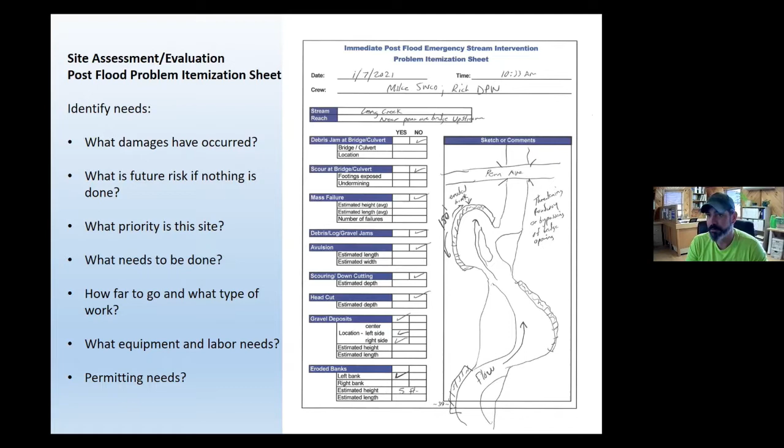What needs to be done? How far do we go? What type of work? What is the labor and equipment needs? This sheet kind of gets you started, and later you can use it as you're planning, to help with the permit process, and in the long run for recording how much work was done and the labor force.

Now we're getting into our walkthrough of the site. We've got a bunch of aerial drone footage that gives us a really good overview. You could see this from driving by on Penn Ave, that there was severe erosion that was a risk to the road.

Although it's not directly at the road, both myself and the DPW person in charge recognized the need to get on this right away, because without any intervention, this would continue to erode towards the road and essentially bypass the bridge. That was the initial assessment, driving by and seeing there's a problem there.

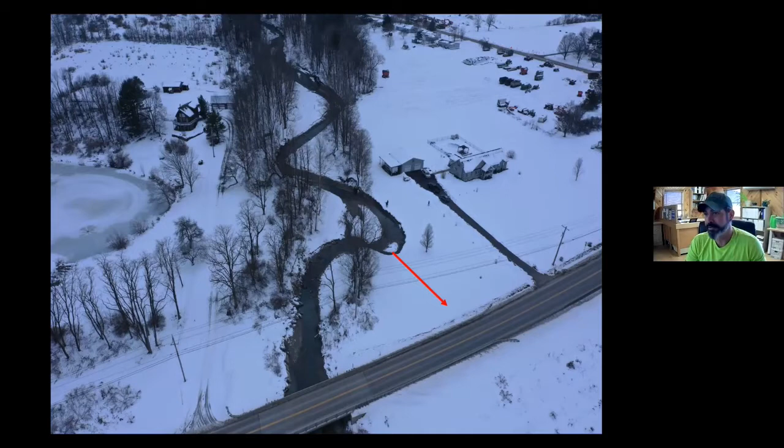Here's a photo of us actually walking out and taking a look at the site. You can see what a large washout has occurred, and the stream is essentially trying to recreate its dimensions, and it's not aligned with the bridge whatsoever.

So we're here talking about what do we do here. Well, let's get some of that gravel from the other side and fill this hole up. It doesn't really look like there's enough there to get it back up to grade and to realign the stream properly.

So we've got to take a look upstream. This is a photo from in-stream looking upstream. You can see the flow coming from upstream is directing the water right into that washout, hence part of the reason it occurred to begin with.

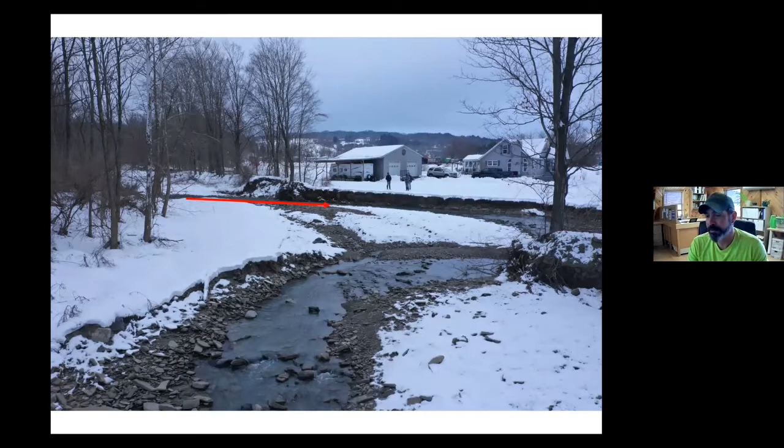If we don't address that, we can refill this entire embankment here, which was the original stream bank. But if we don't address what's occurring just upstream of it, we run the risk of all that work just immediately washing out again in another storm event.

This is just the aerial view with the arrow showing what that last slide was showing, that the flow is directed because of the excessive tortuous meanders occurring here. It's just going to want to wash out whatever we put right in there. Even if we had the resources and time to fill that in and put riprap, our riprap is at risk of failing as well because of that direct force going straight into it.

So we want to start looking upstream a little bit, and also where are we going to source some more material to fill that hole with? Because if we don't fill that hole properly, then we run the risk of it just eroding around and over top as well.

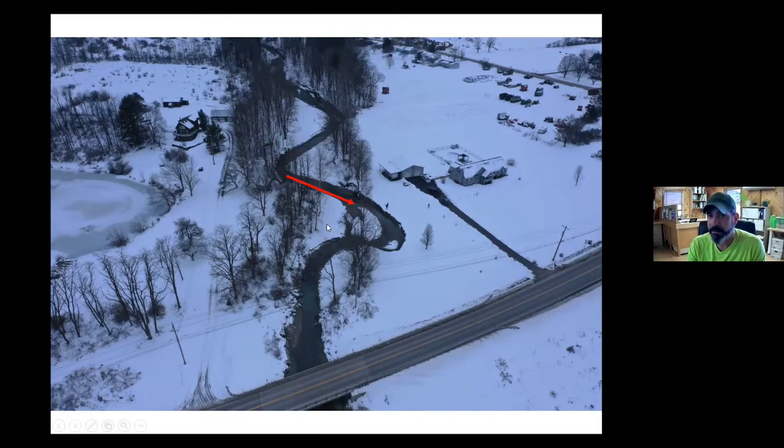This is the gravel bar just upstream. We wouldn't necessarily be concerned with this in and of itself, but because it's causing the stream to flow so tortuously and bring this flow directly into the lower bank, two things here: there's opportunity to steal some of that material to fill the hole down below, and we need to look at the alignment of the stream.

Throughout the training, we've talked about streams need to meander. That's one of the ways that streams balance their energies. So we want the stream to have these meanders, remembering that meandering is a way for the stream to lessen its slope so it can reduce some of that powerful velocity and energy.

We want to see that, but in this case, because there's been such a shakeup with the amount of sediment and meandering, it's causing problems for us because of our alignment with the bridge. So we want to think about that as we're walking upstream.

We don't want to just doze a straight path and berm it up on both sides to make it align with the bridge, because that has a host of other problems that could occur. So we want to try to balance what the stream wants to do with what we need it to do, which is realign back with the bridge and be able to carry that sediment and water flow through without causing excessive damages.

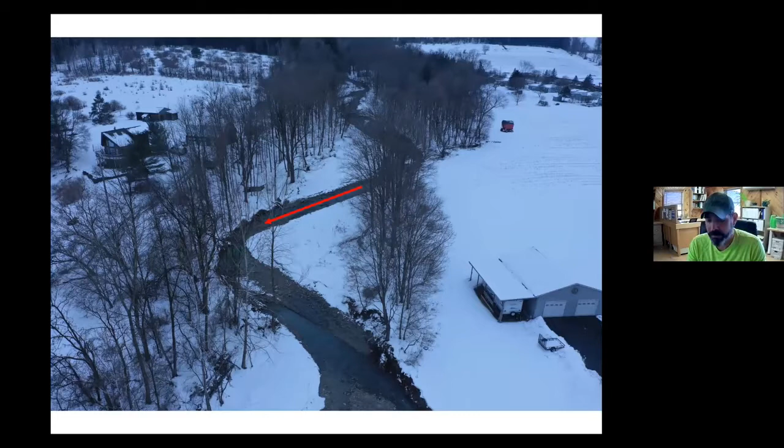Maybe we don't do anything on this bank, maybe we do, but we have to understand what's really happening. As we head upstream, there's the next gravel bar. Again, all of this is natural - point bars forming, the channel having some potentially raw banks on the outside of the bends. None of this is totally abnormal, but because of the huge amount of sediment in this stream from recent flooding events, it's causing some extra problems. You can see on the right bank here that there was a buffer of mature trees that are now gone, and it's beginning to erode into this cornfield. So we want to really take a look at that.

Here you can see there are some of those trees jammed up against the bank, and no vegetation on top of the bank right into that cornfield. So that's potentially likely to continue to erode into the cornfield and become more severe. Those trees have the potential to become mobile in another flood event and get down to the bridge.

In addition, when you look to the left of this photo, you can see how high that gravel bar is. Essentially, that gravel bar has deposited so high that it's technically cut the stream off from its own floodplain. So now all the water is forced to stay in that channel, which gives it a lot more energy for more lateral migration or potential down cutting or head cutting. There's a whole number of things that could be occurring here, and we want to keep our eye on all that sort of stuff.

Another point I want to make about this slide is that these trees here in the bank - we can use these if we're going to do work. We can use these for root balls and for some additional stability in any new bank construction that we do.

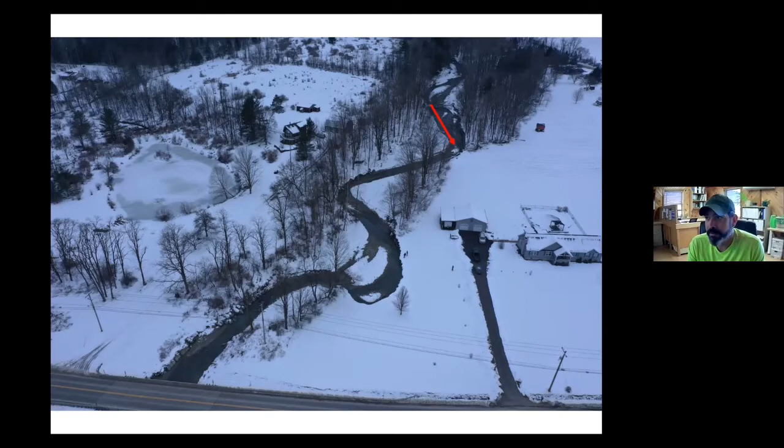And we're looking at, like, where do we stop? How far do we even keep walking at this point, right? And so we got up to the top of that point bar and we see this.

We're like, okay, typical response of a lot of dozer operators would be, well, we got to doze this whole stream. We have to do all of this. We have to keep going. And what we looked at here was like, well, if we even are going to work this far, this is where we're stopping, because now we're far enough away from the infrastructure.

There's no fields or open houses. The corridor is there, even though it's completely plugged with sediment. I don't think we need to go any further because we're past the impact of what we're addressing, which is the alignment with the bridge.

And so we looked at this tree and we said, well, maybe we should get rid of that tree and we could dig it out and use it down below. And then we said, well, we don't need to go up there, so maybe we'll just cut that off.

The roots are still, half of the roots are attached in that bank, even though the tree is down. So they're holding it together a little bit. And so we said, okay, how likely is that tree to come loose and get to the bridge? It's far enough away. If we have time, we'll address it in one way or another, but we'll come back to that. But definitely that's our stopping point.

And so, because you have to stop somewhere. You don't need to, and you shouldn't doze the whole channel. There's obviously an issue with sediment here, and it's pretty plugged up, but there is plenty of capacity within that corridor that you see up above.

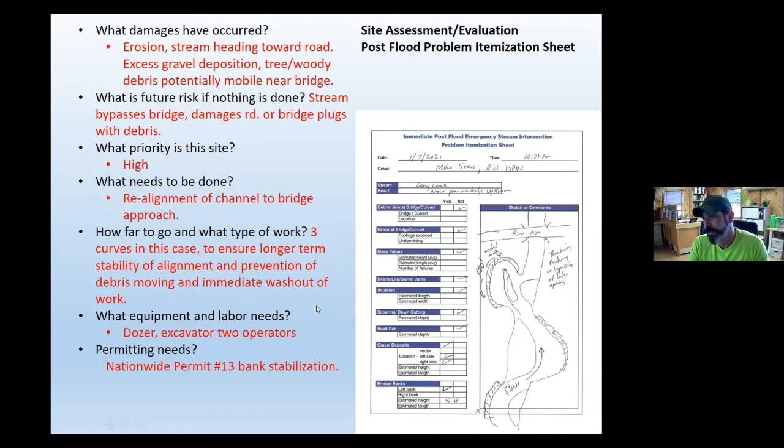So what do we need? A dozer, an excavator, permitting, covered under the nationwide permit number 13. So now we can fill out a little bit more of that information that we're looking for.

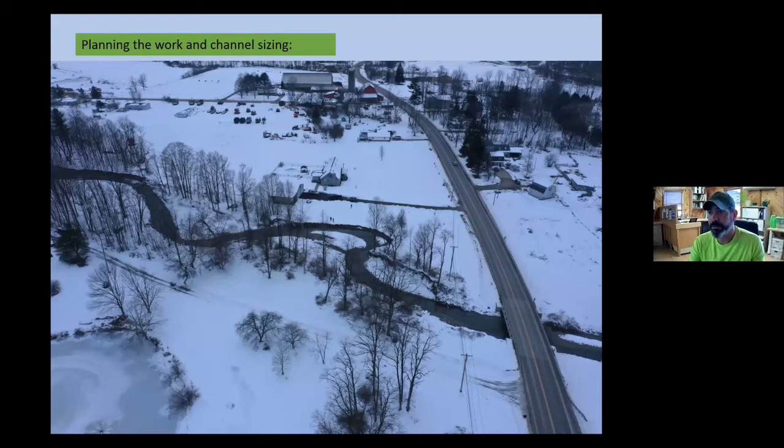Now, getting into the specifics of planning the work and channel sizing, what are some of the questions we want to ask, that we want to be concerned with? What did it look like before? Do we know what it looked like before? What should it look like? How far do we go?

We kind of talked a little bit about those. We're going quite a ways here, but we have determined that we really need to for a number of different reasons. How deep or wide is it? We'll get into that in the next couple of slides with our channel sizing.

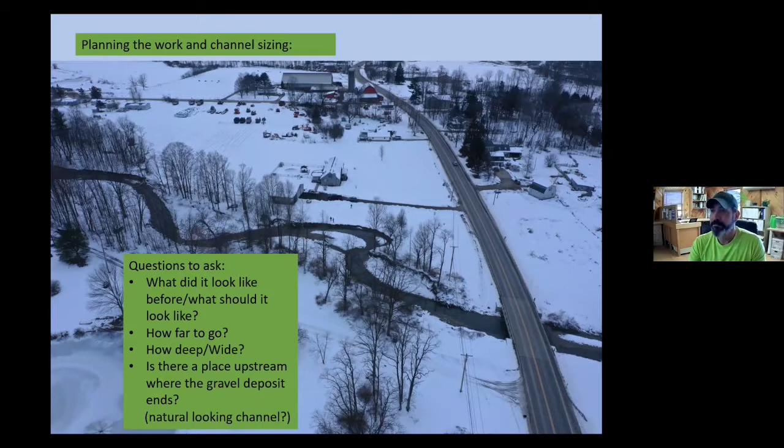Is there a place upstream where the gravel deposit or the issues end? In this case, upstream it's still completely choked and plugged with gravel, but there aren't impacts to the infrastructure, and it's far enough away that we're not going to go any further. We're not going to wholesale doze the stream channel because we don't have time or money to do that, and it's not really going to be a benefit for the amount of work we need to do. Things to be cautious of, things we want to look for.

What are those bank full channel dimensions? Ideally, we find an undisturbed section that we can measure how wide the stream should be. In this case, we kind of didn't have that, but we got some measurements anyway.

If we're removing material, the minimum necessary, we want to watch out for sharp angles and corners. Like in this case, we've got that tortuous meander. That's obviously the water having a hard time because it's wanting to realign itself to a different alignment. Where do we stop?

And the oversight is one very important thing. There's really excellent machine operators that do really good work, are very intelligent people, but sometimes you get behind that dozer and you just go and go and go. So that's where you have to have the oversight. Someone may not have ill intentions, or they think they're doing the right thing, and they just want to keep going and going. So having someone there on site during the work to tell them when to stop sometimes is important as well.

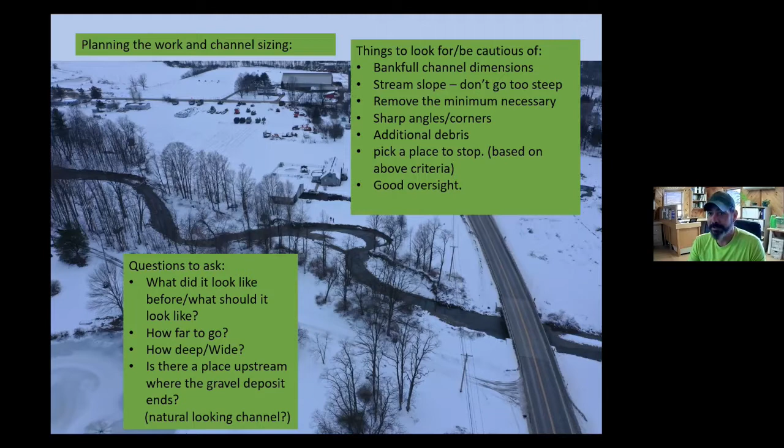So now that we've evaluated the site and identified our basic plan, we're going to look at the channel size. This is stuff that Mike and Jeff covered in the classroom portion of the presentation, but I'm just going to run through it really quick and give you some of our reasoning and how we did it in this case. We'll come back to this because we ended up getting some drone footage after we had a fairly significant flow event, and we could talk about our channel sizing and what worked and what didn't work.

One simple way is to go to USGS Stream Stats online. It's a web application, and this picture on the screen is just the output result of that. You go on the screen and scroll in and zoom in to your place on the map, and there's a few buttons to push to get to that. There's directions on Stream Stats on how to use it. It's really simple — just clicking some buttons and zooming into where you're at, and it will give you this output. So here we have the bankful depth and the bankful width based on the watershed area that it has determined from our point on the map.

And this location is 2.84 square miles. So this says bank full width 26.2 feet wide and depth 1.34 feet.

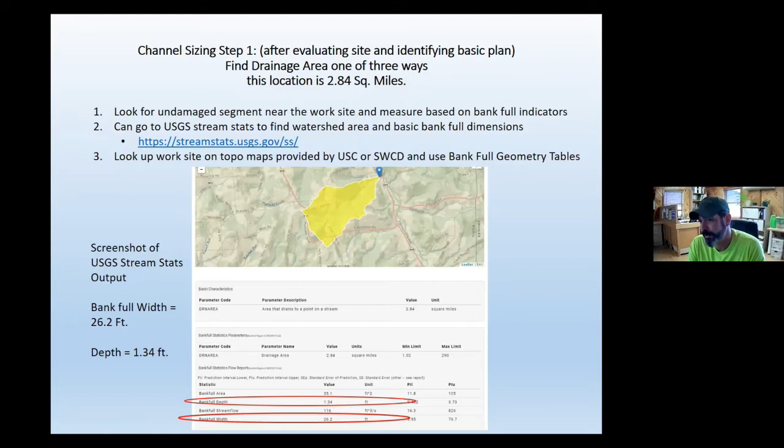Another method to find the channel dimensions is to use the topographic maps that the Upper Susquehanna Coalition has available. You can keep them online as a PDF file, or download them to your own computer, or print them out and have them somewhere in your shop. In this case, it's a color-coded system that shows a range of drainage area for your spot on the map. So here's our site, and you can see it has this specifically colored line.

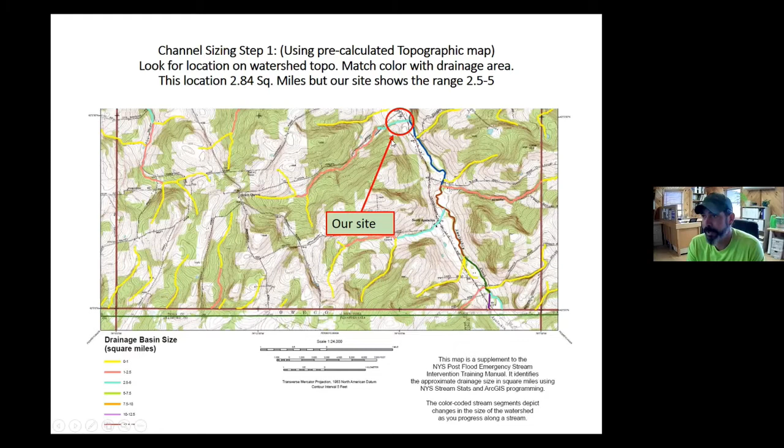And if we come down here, we're in the 2.5 to 5 square mile range. We've already done stream stats, so we know we're 2.84, but it falls in that 2.5 to 5 range. So then from here, we take that number, 2.5 to 5. And if you look in your manuals, the PFESI training manuals, all this information is in there as well.

I'm not sure which page it's on, but this regional map shows us which region we're in for the stream tables. So this is where we are, and we're right on the edge of the southern tier and the Susquehanna region. I often find along this line we can kind of use one or the other depending on what the current condition of the stream looks like. And again, looking at what's happening in the stream and matching it up with these calculated numbers is the ideal way to really come up with the closest numbers that are going to give us the best value.

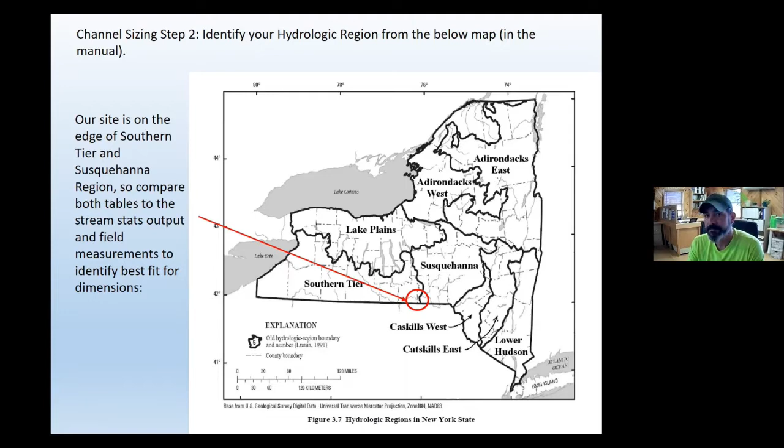So in this case, we looked at both the Susquehanna and the southern tier region, and we compared all of our numbers. We measured in the field — it was 27 to 28 feet wide at that spot that we showed in the previous slide. Our drainage area is 2.5 to 5 square miles based on the topo map. So we looked at the two tables, and in this case, I picked 5 square miles on the Susquehanna because I felt like that number, 27.8, was as close to kind of the average of all the other numbers we looked at.

The easiest way to go about this would be to say 2.84, that's 3 square miles, so you pick one or the other. In this case, if we went 2.5, 20.4, and that's different—stream stats was 26.2. So you can see none of this is perfect, but it's getting us closer to that actual dimension that the stream will be able to heal itself from.

Another way is if your soil and water district is able to help you, you can call them and they can give you these numbers. Essentially, this is all laid out in the manual, and it's a lot more clear than how I have it on this slide. I wanted to show the comparison of stream stats with our field measurement and estimating based on the two tables that are really close to each other.

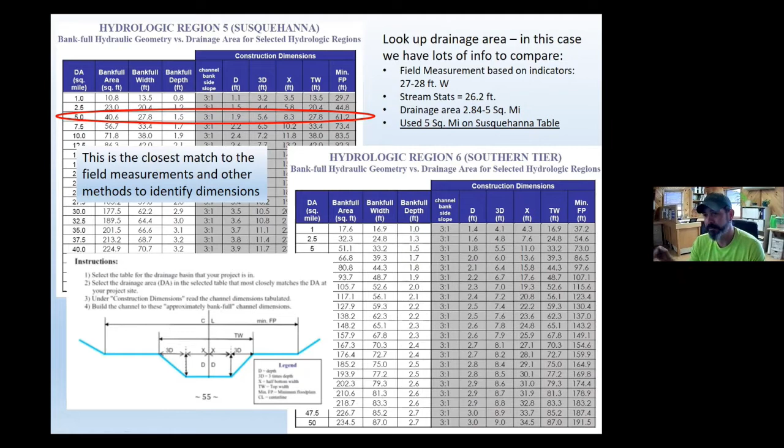This is sort of what your output should look like. This cross-section diagram is essentially something you could hand to the operator and say, here, that's this wide on the top—it's a 3-to-1 side slope, trapezoid channel. You have your minimum floodplain, that's where your bench height you want to be. In Tioga County, I've developed this, put together this form from just a PDF document.

I can just fill out these numbers and print this out and hand it to someone, and that makes it a lot easier. I've also taken it one step further to calculate the bottom width, and that comes into play later on as a much easier way to kind of talk about things.

So this is our basic diagram of our channel dimensions. Here we have 27.8 top width, 16.6 bottom width. Again, the bottom width is explicitly calculated because sometimes it's easier to know what your bottom width is before you even get to your top width. This is a sheet that can be handed directly to the operator, to the permitting agencies, and it tells us all that we need to know.

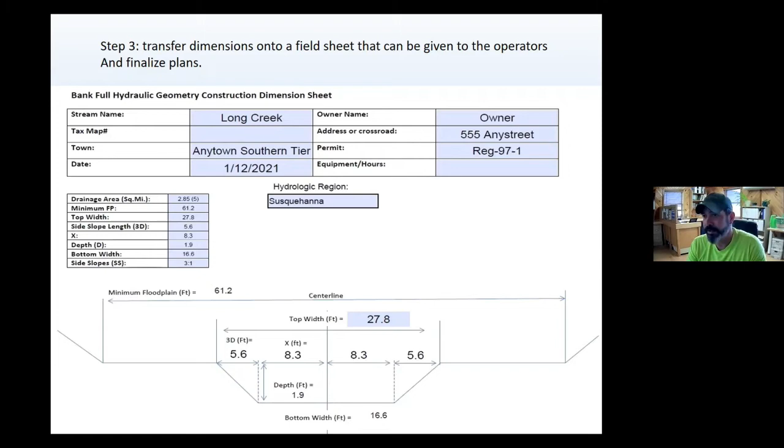So now we're looking at our final plan—what we're actually going to do out there, our layout and our alignment. The main point in the channel sizing is to get that stream width, depth, and floodplain as close as you can to a natural state to allow the stream the least amount of adjustment.

I'm going to say this a number of times: anytime we touch a stream, it will readjust to the work we do. The idea here is to do the least amount of work necessary so that the stream ends up doing the least amount of work and adjustment after we've done the work. We want the stream to adjust slightly to what we do, not violently.

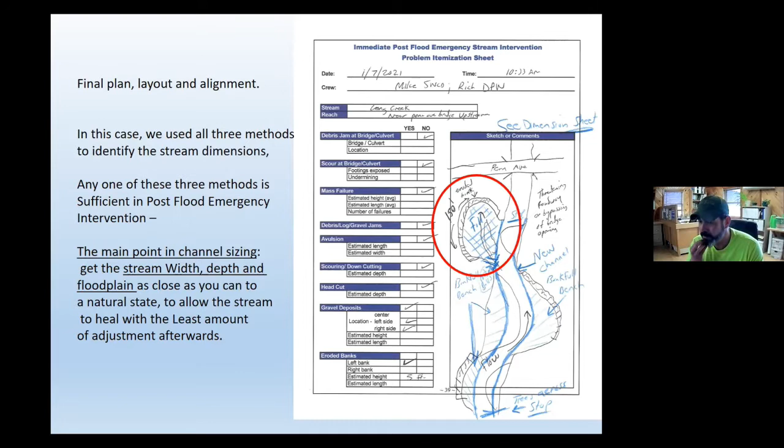So this is where we decided we would start the work on the low end of the big washout, because that is going to take the most amount of fill. In this case, we intend to fill up to the height of that adjacent lawn, because that technically shouldn't be part of the stream corridor. That floodplain is within that other corridor to the left of us here. So we're going to need quite a bit of fill to get this filled in.

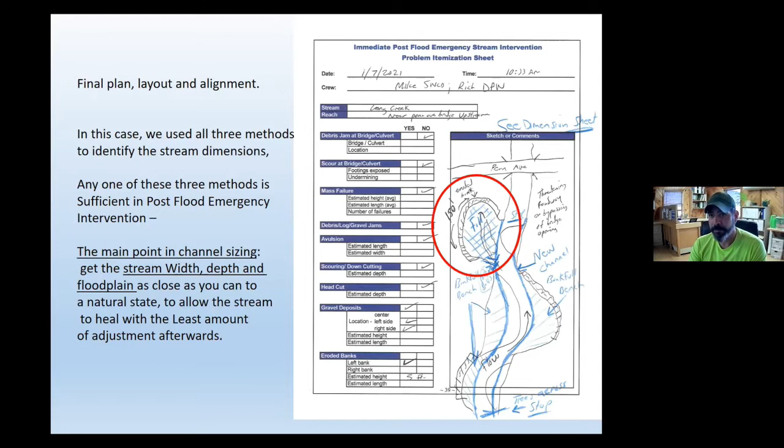We wanted to start there to make sure that was our critical point. If all we had time, money, or available fill to do, that's what we would do, and if we had to walk away, then we've done the minimum necessary. That's why we're going to start there.

On site for construction, we have to dewater—we've got to get the water bypassing our work site. So we're looking, we can cut a temporary diversion channel over there on the left side of the stream, stockpile material in the middle, and then start moving it over. We're not working in flowing water, and something that's good about this site is we have plenty of room to do that here.

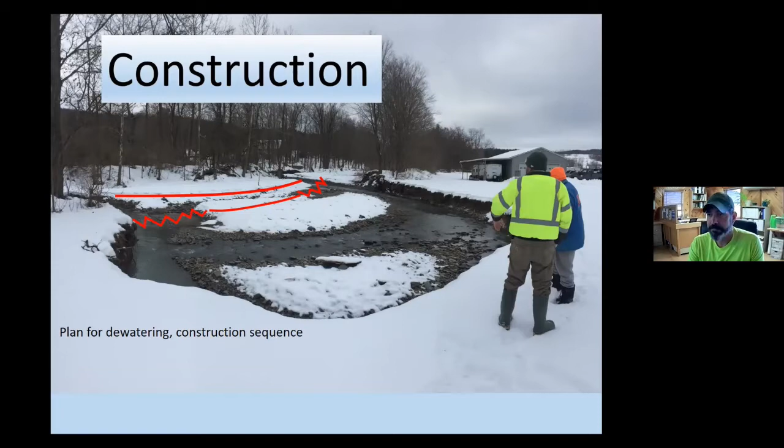Here's just getting started, initially cutting that diversion channel. He started on the downstream end and is just working his way up to here, stockpiling to the left of him. Once he gets up to the top, we will dam off the flow of that flowing water and send it to the right in that diversion channel, so then we can go to work on moving the bulk of that fill over.

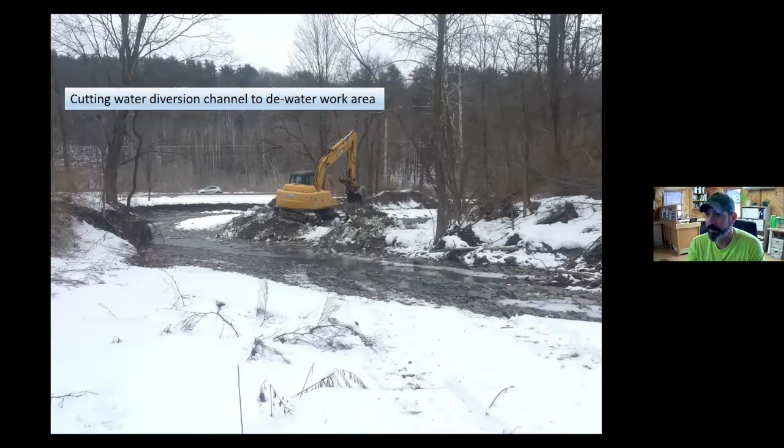So here's the filling in the washout, and we're bringing it up to the existing grade of that lawn. And then once we get over to where the tree line used to be, we'll slope it down and start building our benches within the channel. But for here, we're just bulk filling to prevent the stream from washing this out again.

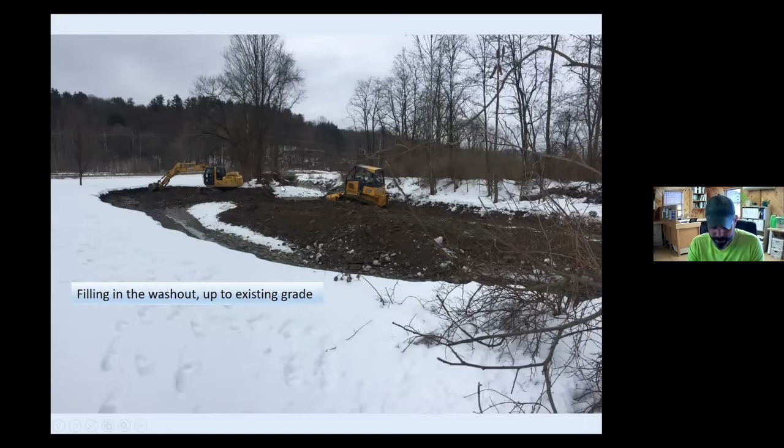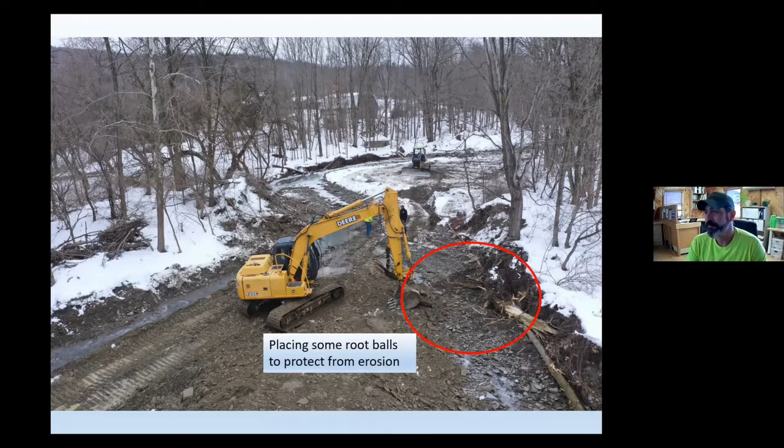And then above, we're clearing snow from the gravel bar above, because we're going to need to source more material from that gravel bar to continue filling the lower washout.

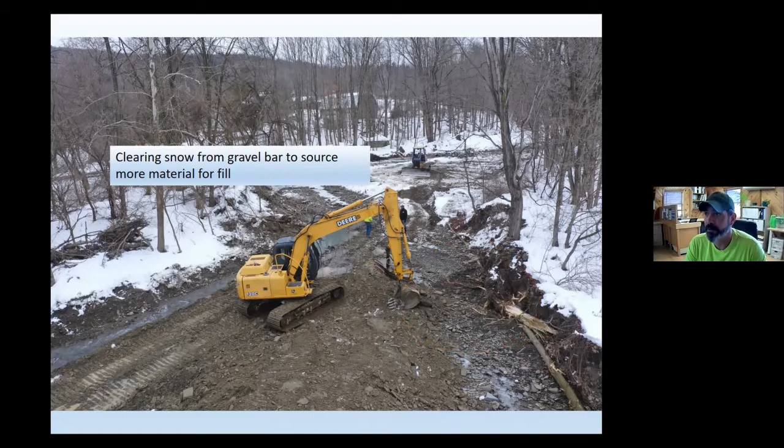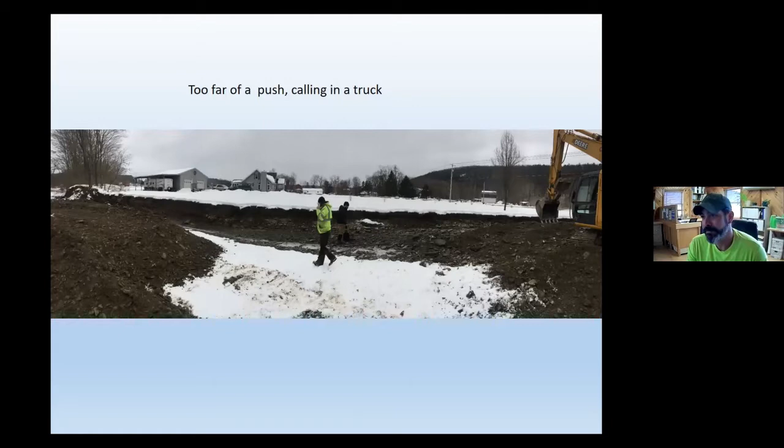Since we did need material from that upper gravel bar, the guys decided it was going to take way too long pushing with the dozer because it was quite a far push. So it was time to call for a truck. This is an example of the midstream, on-site changes we needed to do, and luckily something was available so we could continue work right away.

So we could have just used an actual truck to move that material, or a front loader would have easily been able to help move it as well. I just wanted to point out that this is a specialty machine that was available to us, but wasn't necessary - it's just what we had. It would have been able to be done with a truck or a front loader.

So we're doing the bulk of the earthwork first, and then we'll come back through and do that final clearing, grading, and bench construction within the corridor. We want to make sure we get the bulk of that material moved first, so that our alignment can be seen afterward.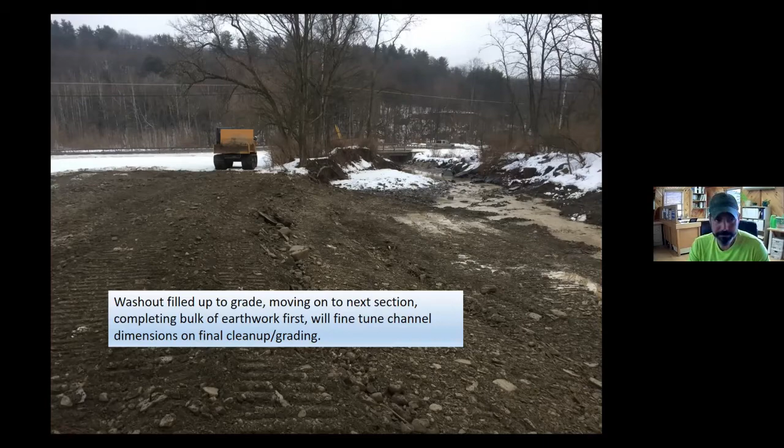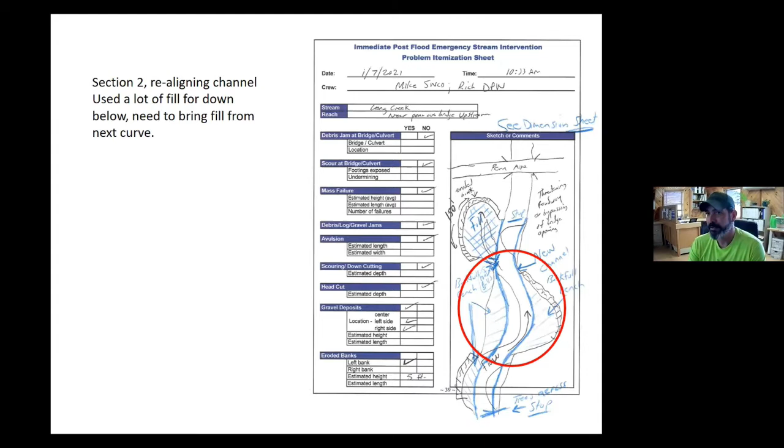So now that that section is complete, we're able to move up to the other section. As you can see in our plan here, we want to realign those curves, and so we've got quite a bit of fill to put on our right side bank full bench. I'm just going to run right through this next section.

So here we are with the water diverted, and we're moving the rest of the material over to fill in that tortuous meander on the left. The dozer is prepping to bring more material from up above, because essentially we've had to hopscotch material since we needed so much for that lower washout. So we took some from this middle bar, now we're going to take some from the upper bar.

And all throughout this, we're keeping in mind our elevations for our floodplain, for our bank full bench. By moving this material in this way, we're setting ourselves up to allow the stream access to a floodplain again.

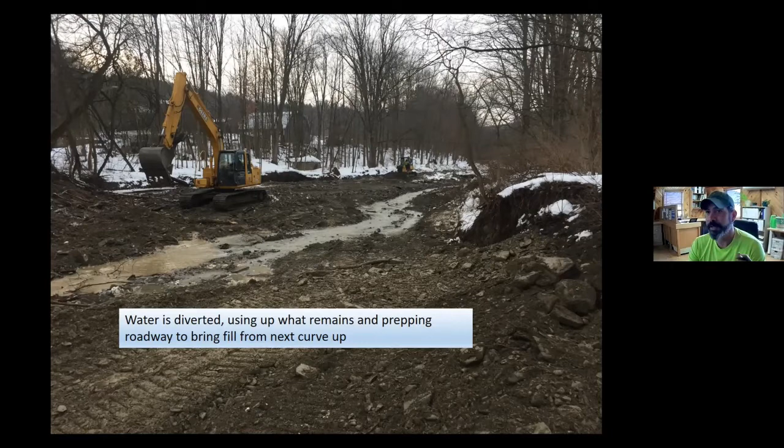So this is just a photo of the snow cleared and a little roadway put in from the uppermost gravel bar, getting ready to move material down.

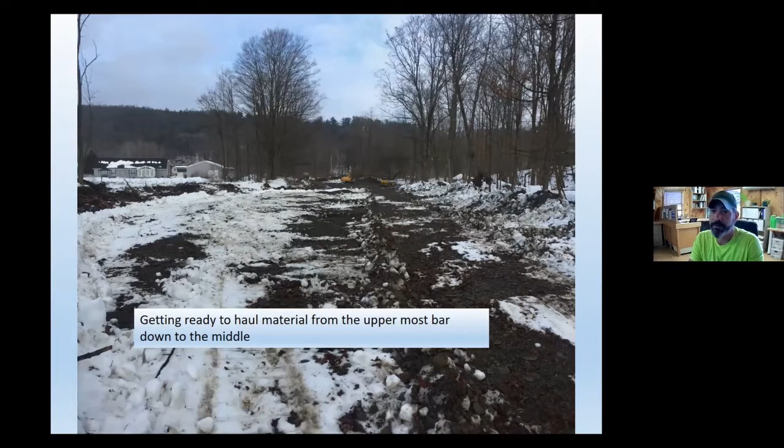And here on the left, you can see we're beginning to just put the bulk of the earthwork in for that bank full bench on that outside of the curve there. Again, just roughing everything in - we're getting the rough bulk earthwork done first, then we'll start aligning and shaping the channel.

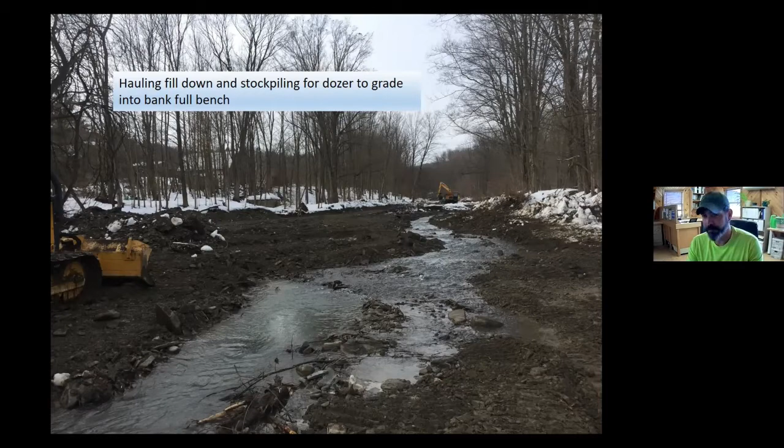This is a personal preference of your operators, how you want to go about this. This is just the way that we sequenced it. There may be other ways, more efficient ways, different preferences, but this is just how we happen to do it. So our method isn't the only way, it's just the end result - what we're looking for is ideally what we can all agree on at the end.

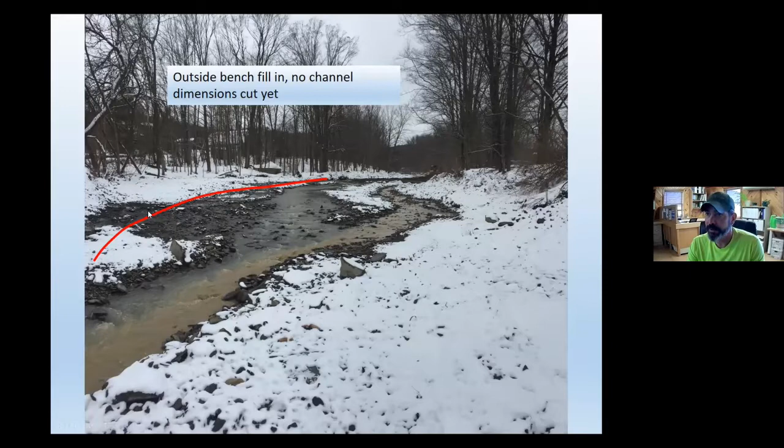And here you can see we've got the bulk of that earthwork on that outside bench in, and we haven't started cutting dimensions. Now we're going to move on to the upper curve.

And again, here we are on the upper curve with these large trees and root masses. So instead of moving those around a whole bunch, we just essentially crushed those down in, and we were burying those in our new bank.

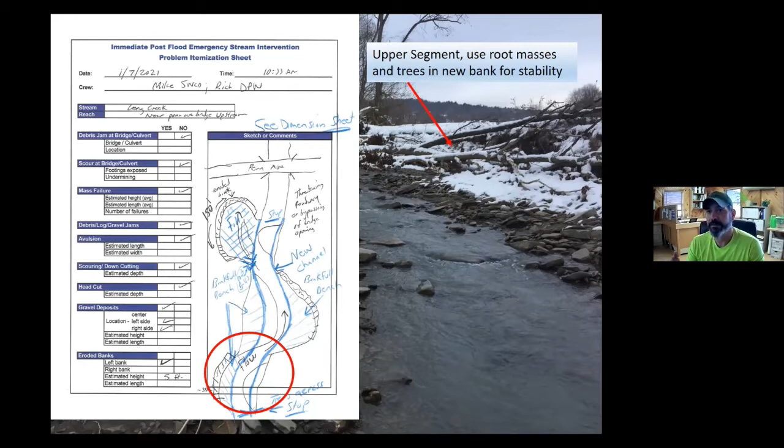So in this case, we're actually going to slope that bank up to the top, down at maybe a 3 or 4 to 1, and then start our bank full bench from there, anticipating that the stream probably will erode back to that point at some point in the future. But now we've created a little bit more of a barrier to erosion, giving the stream a chance to slowly heal itself rather than catastrophically move again.

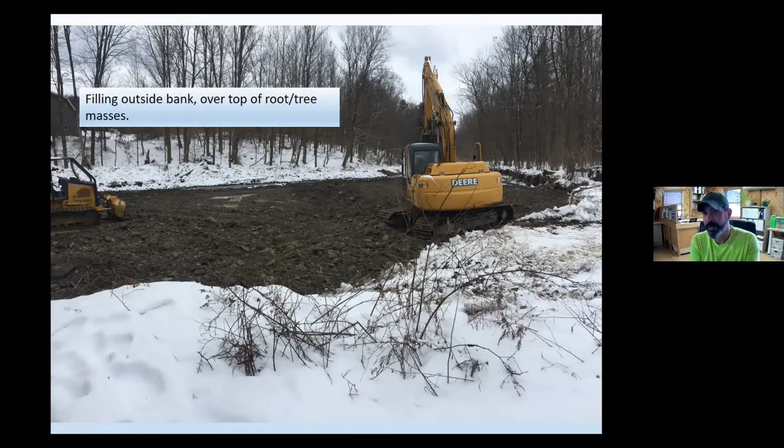So here again, completing the bulk of the earthwork, getting that filled against that outside bend, and starting to work on where that channel alignment's going to go, a little bit more to the center. Not straightening, but flipping that channel a little bit.

So here we are with the bulk of the heavy earthwork completed, and now they're working in tandem to start putting together the actual stream dimensions, the bank full dimensions. They're cutting and still moving material, but also really roughing in that channel shape and dimension at this point.

And then we have a video of that.

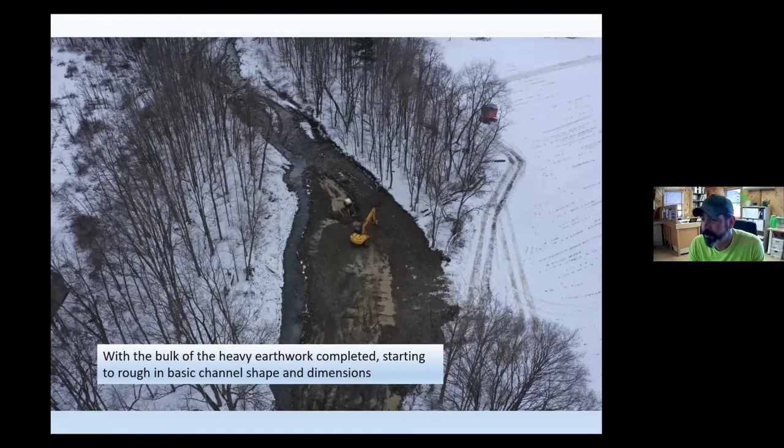And so you can see here, they're still doing some of the bulk of the earthwork, but while they're cutting the channel in, because we've reached that point in the project. On the left, you can see we still have our water diverted, so we're not working in the flowing water. So they're working on filling the bank, creating the bench, and the channel dimensions all at the same time.

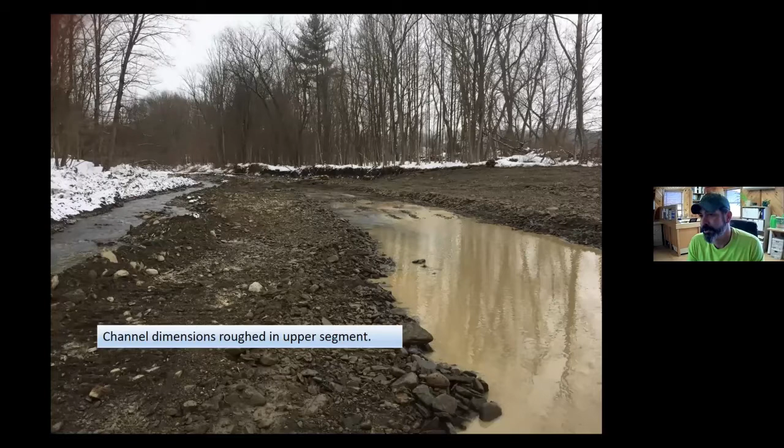So here the channel dimensions are roughed in. We still have our water diverted around the site. You can see it's not perfect, but that was one of the things I wanted to mention about the bottom width of that channel.

One of the easiest ways I found to communicate how wide the channel needs to be is using that bottom width number. I say, how wide is your dozer blade? 8 feet wide, channel 16.6 feet wide. It's about 2 dozer blades wide.

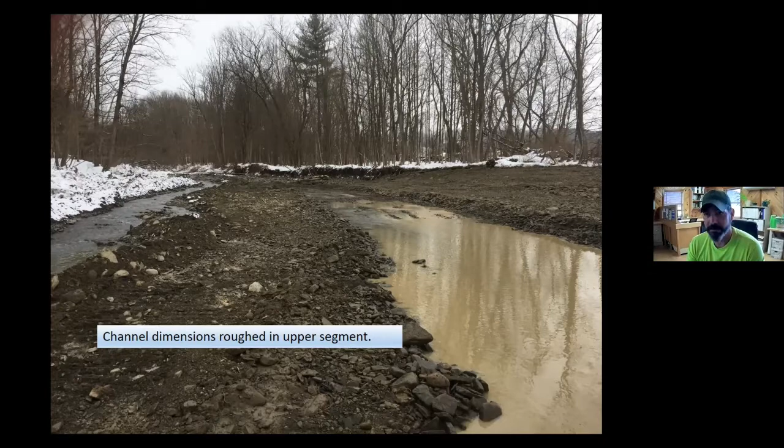So during construction, you don't have to get out and measure all the time. Any operator can do this and has been doing this. So I want to add that we don't have to always be surveying or measuring while the work is being done. You just know how wide your dozer blade is, you know what that bottom width is, and you can go ahead and get those dimensions roughed right in.

As I was walking the site while they were working up above, I noticed that the slope right here was a little bit steep. That concerned me, that if we leave the slope too steep, we could potentially send a head cut upstream. And now that we've loosened all that material, it would be that much easier for that head cut to work its way upstream.

So we don't want to make things worse. And in that case, if we leave it too steep, we could cause a lot of that sediment to become mobile and go plug the bridge. So that's completely counterintuitive to what we're trying to do.

So we want to pay attention to stuff like this. Anywhere, if you leave a drop off or a really steep section, that is going to help the stream react negatively and cause a head cut to go upstream.

So because of that, once I noticed that, and they had essentially the bulk of the rough in of the channel on the upstream curve, they decided to work their way from downstream to upstream to switch, because we want to be able to chase that slope. So in this case, we started on the downstream end, and now they're working on roughing in those channel dimensions from downstream working upstream.

And something I want to point out here is right in the front left of the photo was a place where we decided to stop. So where I'm standing is in a pool of water.

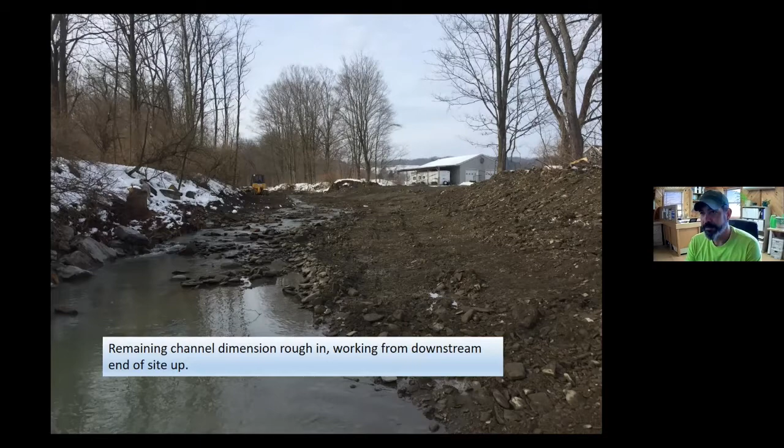Just above that pool of water, you can see that riffle where the stones are exposed in the channel where the water is flowing. That's a natural riffle that was there before we started work. It's a little bit steeper there, but that's all imbricated stone, shingled in together in the bed of the channel.

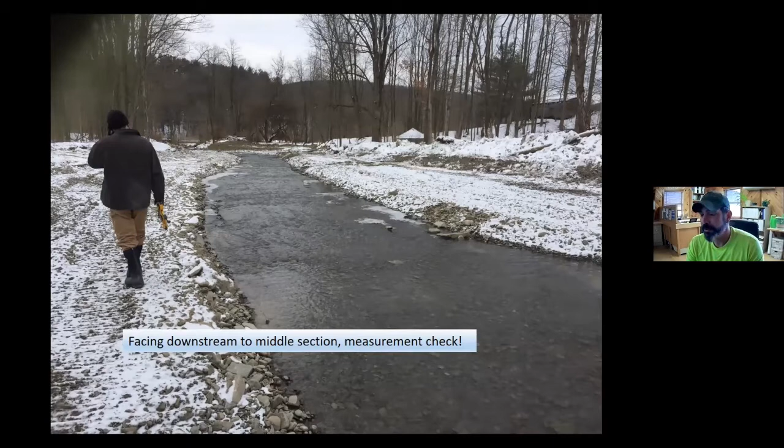So now we're doing a measurement check. Are we there? Do we have it? In this case there was a little bit of tweaking to do. We were pretty close. At this stage, if you had to move on to the next site immediately, we would call this close enough. We were within a foot or two of our top width, and we have the bankfull benches in place. We had a little bit more time to tweak it further, so we did.

Again, in this case, if someone showed me this photo, I'd say looks good, move on to the next site. But since we had the time and the ability to get the measurements, we wanted to make sure we had those dimensions uniform.

Another thing we did on the site, since we had the ability, was cut some live willow stakes from another site we'd previously planted, and trenched those in on that low bank where the washout was, for a little bit of added stability. Before we even started work, we'd talked about eventually needing riprap or in-stream rock structures to redirect flows away from that eroded bank and keep them aligned with the bridge. But we were in emergency intervention mode, so we didn't have time or money for that. The willows took one guy an hour and a half to cut, haul to the site, and install. The excavator trenched the bank down to the water table, and we threw them in and covered them.

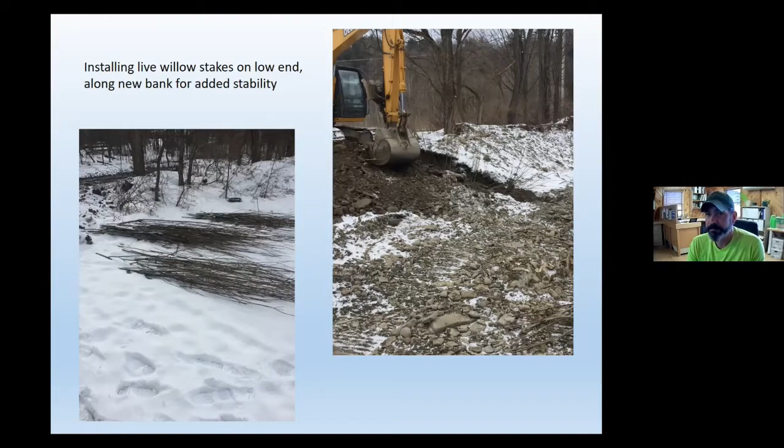This is just a view of where those three lines of willows went in, with the anticipation that if they're able to start growing, they'll help hold that bank together a little bit.

Now we've got another video coming up next of the final cleanup and walkthrough.

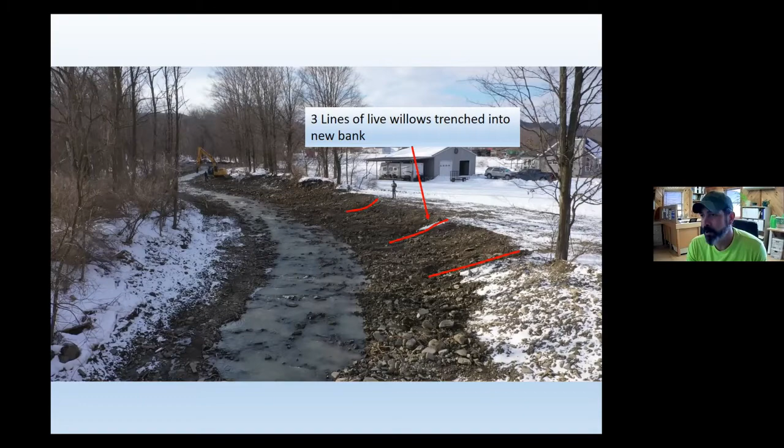So now we have another video of about a month after that, where we've had a couple of significant melt-off and rainfall events that were near or just about or just below bankful, enough of an event to start moving material in the channel. And then we can run through that and talk about what changes the stream did make, what we got right, what we would have done better knowing what we know now, what we need to worry about. This is sort of the follow-up section.

So here we are starting upstream. You can see on the right here, it did begin to form a new point bar within that active channel, as we expected, and it's going to want to start cutting a little bit. One thing we noticed is as we round the turn here, it did begin to form a center channel bar there, which is not ideal, though it is still within that bankful dimension.

You can see it's kind of cutting around on the left side. We anticipate that it's going to end up cutting around on the right side. Right now, it's not a concern, but we're going to keep an eye on it.

Essentially, the channel has stayed in place where we put it through those two events. As you can see here, it's not immediately slamming against that washed out section, and it is still coming within alignment with the bridge. So we've met our goals.

It just maybe there's another center channel bar just down below, just above the bridge here, you can see. So we got the dimensions maybe a little bit too wide in this case. And I guess that's one of the lessons is, essentially maybe you want to go a little bit narrower. If you're going to error a little bit narrower rather than wider.

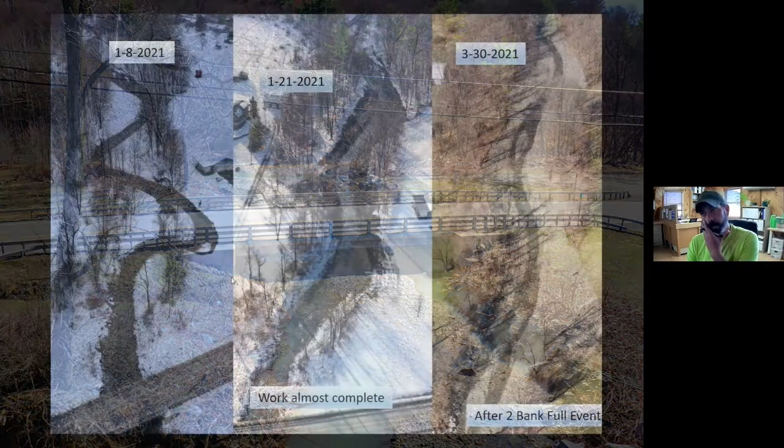So here's a side-by-side of the aerial views from our initial site visit and assessment, essentially the completion, the final cleanup of the work, and then after a couple of those storm events. So Mike, I think you and I were having a discussion previously about those center channel bars and kind of what we could look at, and gauging the level of success of the project.

And so, as you've already pointed out, that material's been shifted and sieved around, and so those fines will start to settle out, and they'll start to be deposited and repositioned in places. And until you get a few storms that actually are bankful events that start to mobilize all that material and readjust them, that'll happen. And so we need to keep an eye on that to see if we've got those dimensions right. So, that's a good learning piece for that.

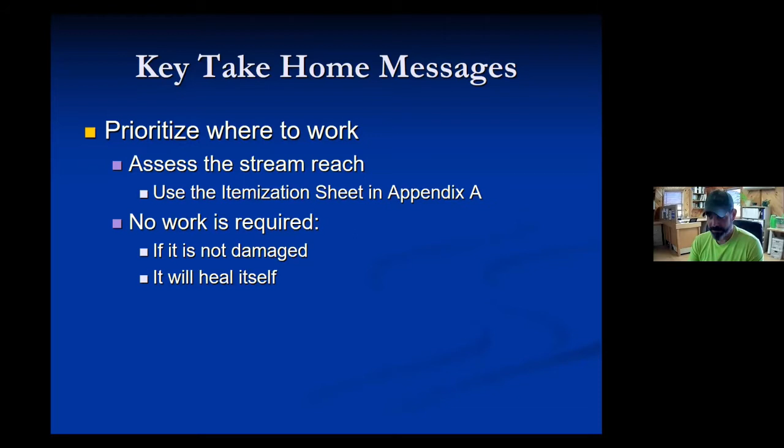When looking at areas you've prioritized, just like we did, we kept walking further upstream to see where the problem ends. We may not have had to go as far as we did, but walking that extra distance to get an idea of what's going on around the next corner is really important, because sometimes you find your work is needed in a much smaller area. Other times you realize that if you don't go a little farther, you'll end up doing work for no reason and you'll be back again.

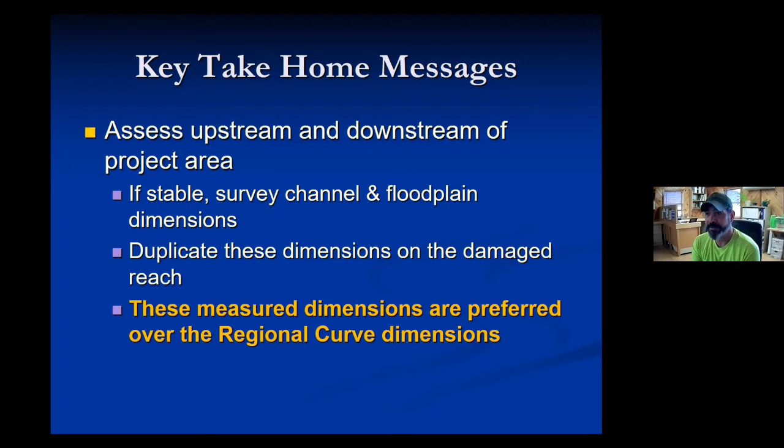So again, we want to look at all these things. Ideally, if you're realigning or redimensioning the stream channel, the best scenario is finding that undisturbed reach right around your project area, because the stream itself is the best teller of what it wants to do.

So again, this is repetitious, but it's one of the most important parts: we want that stream to have access to the floodplain wherever possible. That's one of the ways it slows down and reduces its energy. We want the dimensions as close as possible so we can move sediment, water, and debris through with the least amount of damage or adjustment.